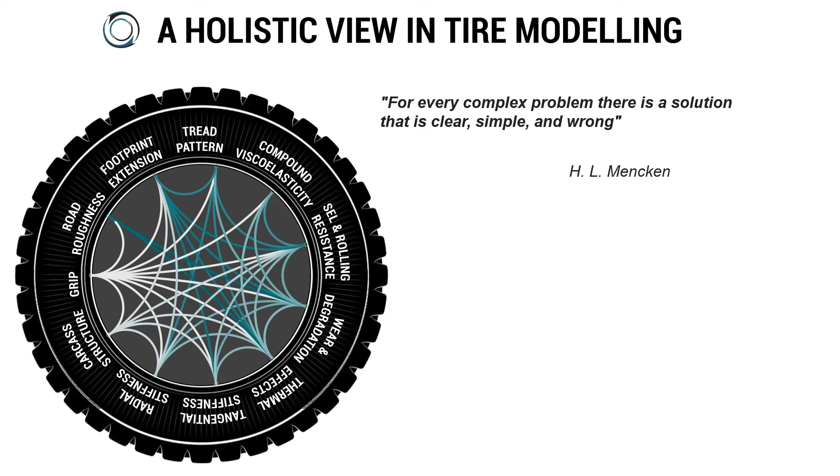The solution to this complexity, in our vision, is the development of a modular modeling platform. We developed two performance tools able to take data from outdoor reality and get the right model parameters. Then we developed four physical models comprising the RideSuite, in which each model represents a physical phenomenon. The user can decide which one he wants to select, creating his own tire model accounting for the aspects needed for the work.

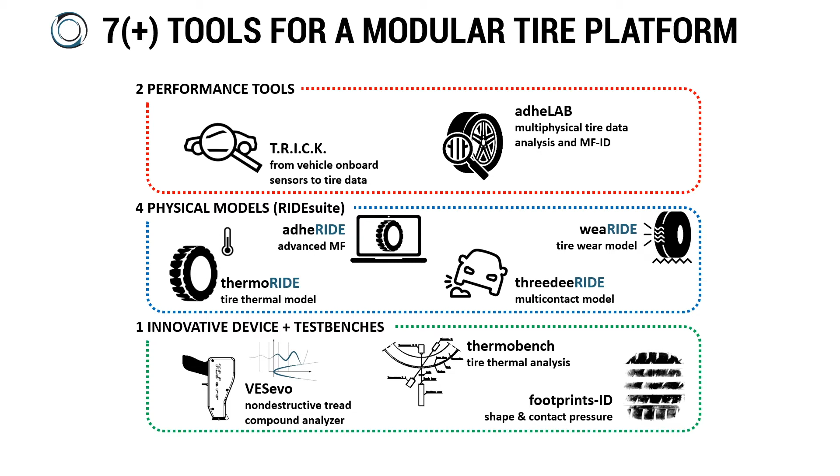And finally, we develop methodologies, testing devices and procedures, able to get the proper data from the tires, feeding the models thanks to fast and non-destructive analysis.

So let's move on the journey. In the last years, we focused on the technological transfer of our methodologies from research to market. We developed our software models in their closed and final shape, creating the RideSuite and its modules. Now we are focusing on procedures and standardization, with the aim of offering our partners a well-defined routine that in about 6 weeks can bring from the black and rolling object to the multiphysical digital twin.

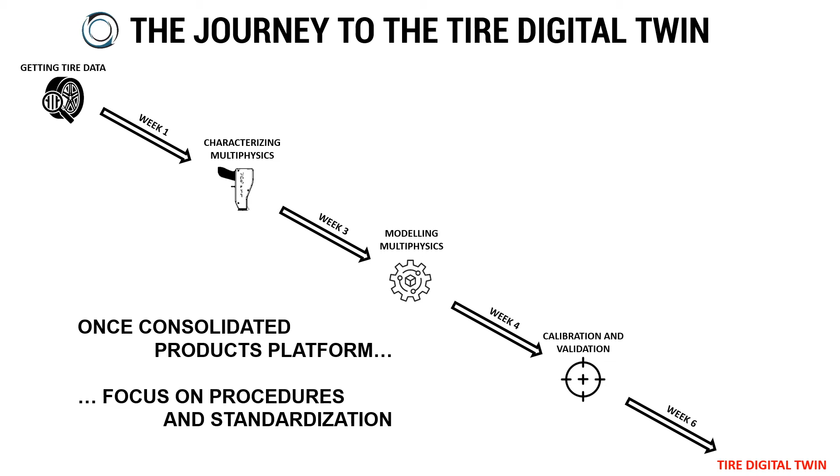So the first step involves getting tire data. I will give you further details in the next slides, but the main aspect in our approach is to be compliant with anything else, so you can use force and moment bench, dyno hubs, trailers, or work with vehicle data by means of the tools we can provide.

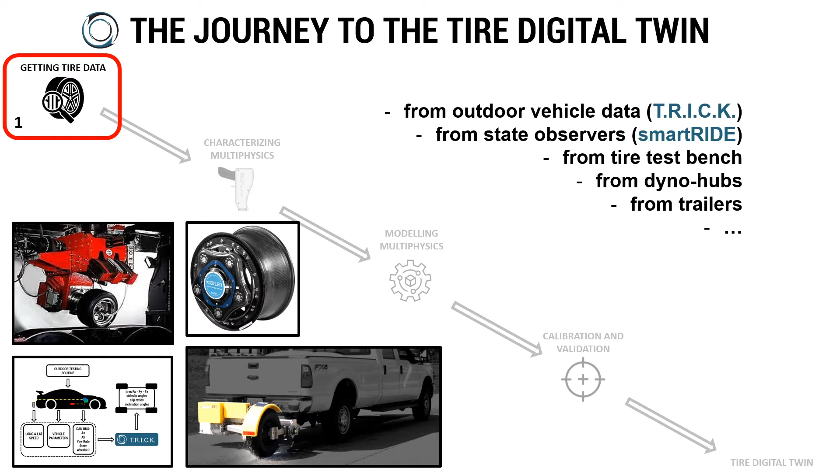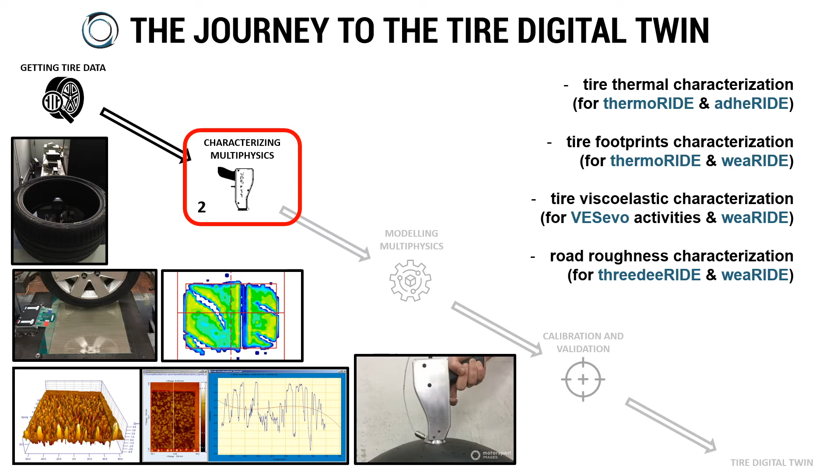Second step, characterizing tires. In a multiphysical approach, this means characterizing from thermal, viscoelastic, structural, and wear points of view, depending on which module our partner wants to work with.

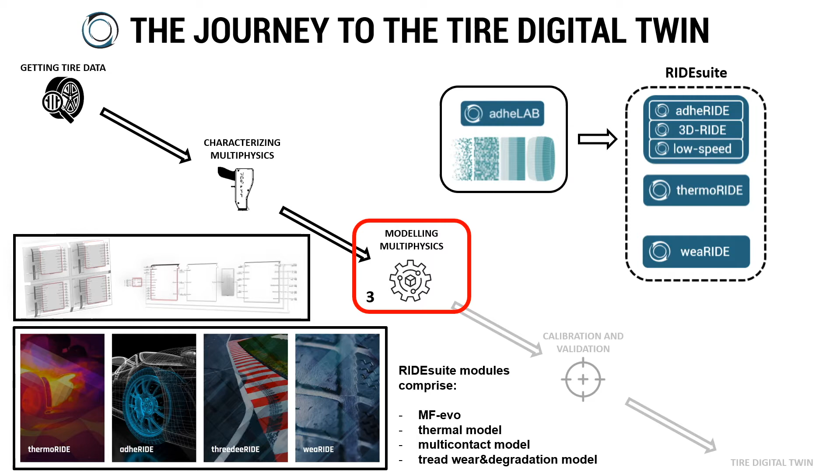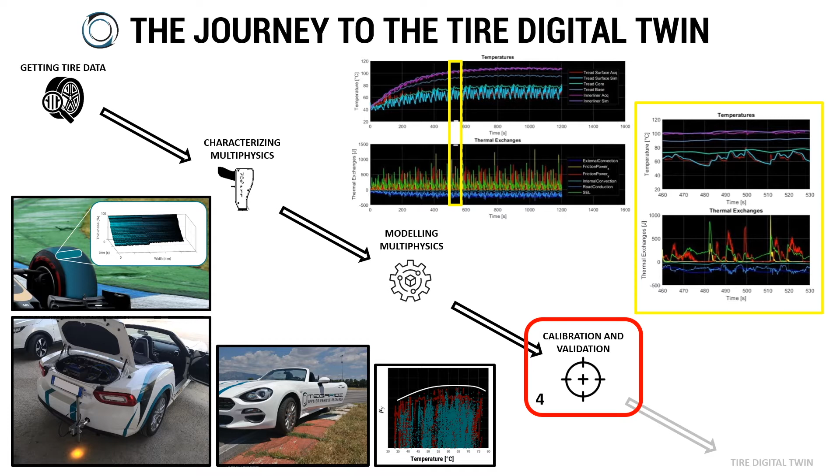Then, third step, implementing these tire parameters inside the physical models of the RideSuite. There is the thermal model ThermoRide, the advanced magic formula adheRIDE, the multi-contact model 3DRide, and the wear model weaRIDE. Then, of course, we need to calibrate and validate the models thanks to data acquired during specific outdoor testing sessions carried out with sensed tires and vehicles.

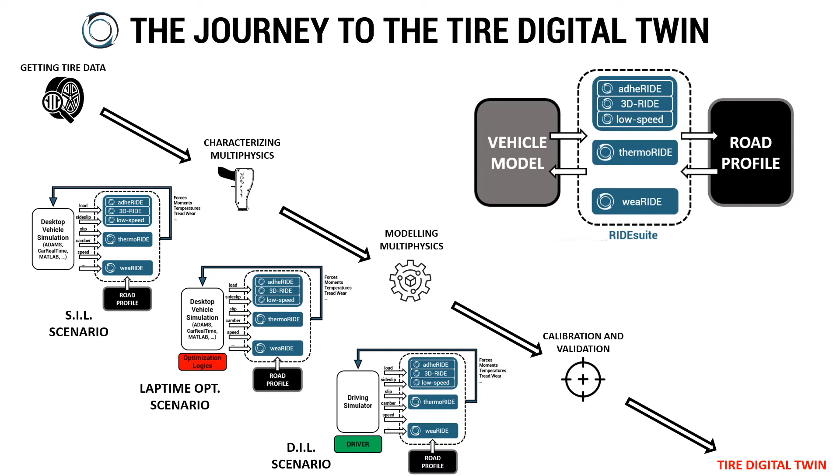And finally, we get our target: a multiphysical replication of the tire behavior that can be used in several application scenarios, from data analysis to software in the loop, driver in the loop, etc.

So, once we've provided a global overview of the presentation, let's go back to the beginning, getting the tire data. The first step to meet the tire involves getting dynamic and kinematic data from it. We all know there are several different methodologies: some of us use force and moment bench, some use dyno hubs, some use trailers and outdoor friction testers.

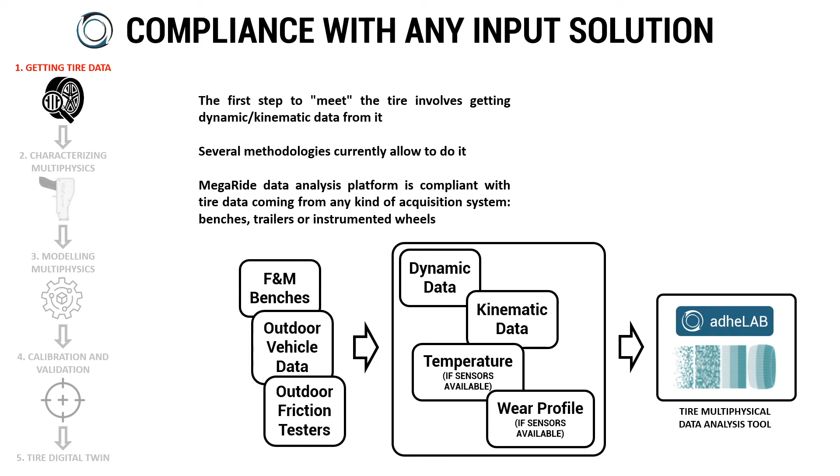We don't have problems with any of them. We get the data from these kinds of tools and subdivide them into dynamic data, kinematic data, temperature data, and wear profile. All this information is analyzed by our tool called adheLAB, which is able to take all these parameters and put them inside our physical models.

In case our customers don't have this kind of technology available, so they don't have a force and moment bench or trailers, they can use, and we usually prefer, this kind of solution: real outdoor data. Outdoor data means real tires, real road, real working conditions.

For this kind of users, we developed the Trick tool that is able to convert vehicle sensor data into tire data. It's a physical vehicle model, and it allows us to convert the data from the vehicle to each corner of it.

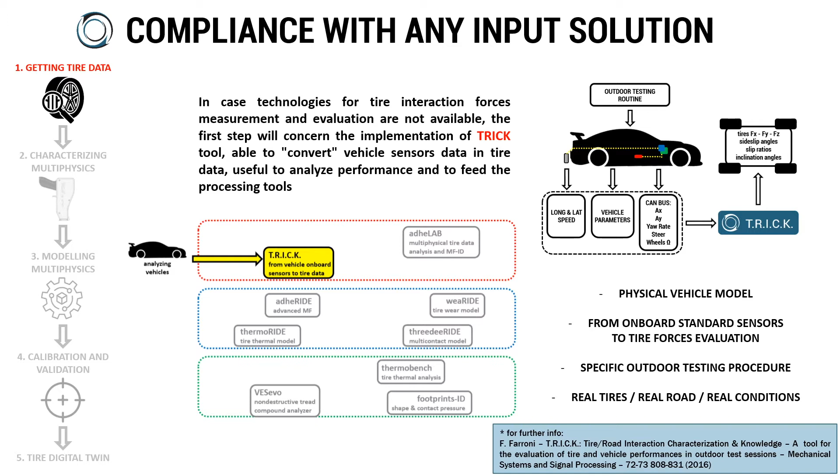In the last couple of years, we also worked a lot on the Trick tool because it allows us to work with heavy vehicles. So we have the Trick for truck, also with two-wheel vehicles, so we have the Trick for bike. We are also working a lot with the new CAN bus and the evolution of the vehicle data we are going to face, so we are developing a 2.0 version of the Trick.

We are also coupling all these methodologies with the real-time onboard state observers that, of course, are growing up quite a lot in our vehicle dynamics community.

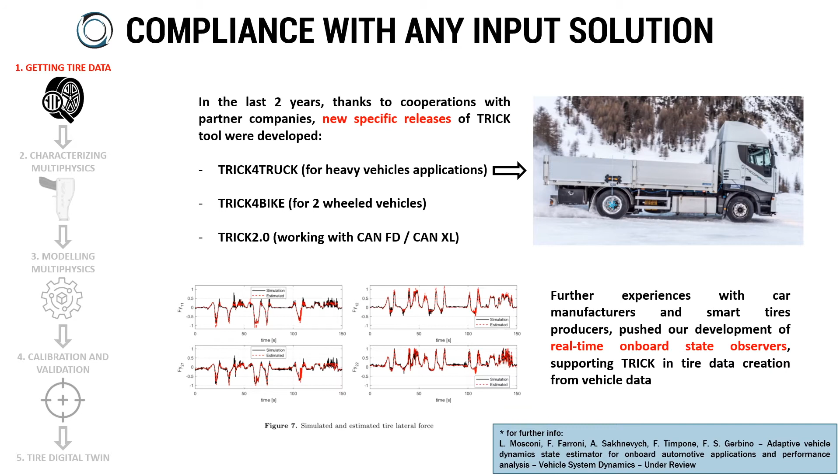Let's go to the second step, characterizing tires from a multiphysical point of view. The first stage is usually characterizing them from the thermal point of view. So if one of our users wants to work with the thermal model, we can identify the thermal conductivity and the specific heat of each different layer constituting the tires by means of a specific non-destructive and proprietary methodology.

This allows us, by means of thermal cameras and laser beams, to identify such quantities. Once the test has been carried out, testing the tires with different levels of thermal power, we can identify the functions with which thermal conductivity, specific heat, and density change for each different material and layer of which the tire is constituted.

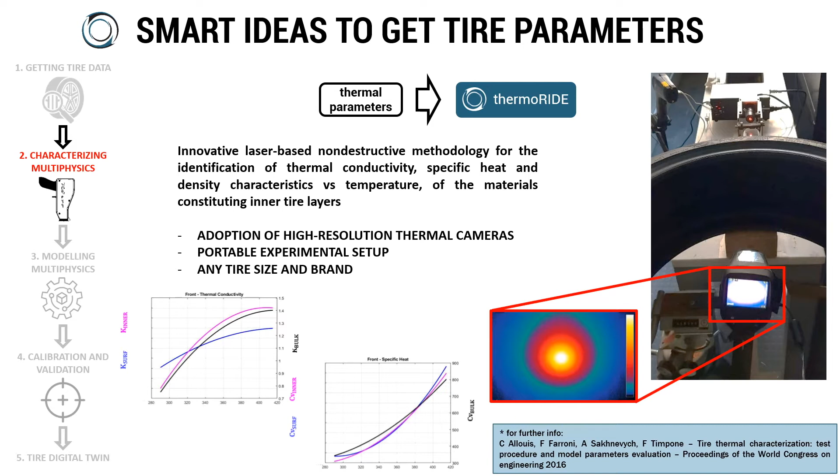Second step, as concerns the parameterization, is the viscoelastic one. We developed, again in the last couple of years, a new device. It's a patented device - we have a patent in many countries of the world nowadays - called the VESevo. VESevo is a non-destructive tire viscoelastic testing device. It's completely portable, fast, and easy to use.

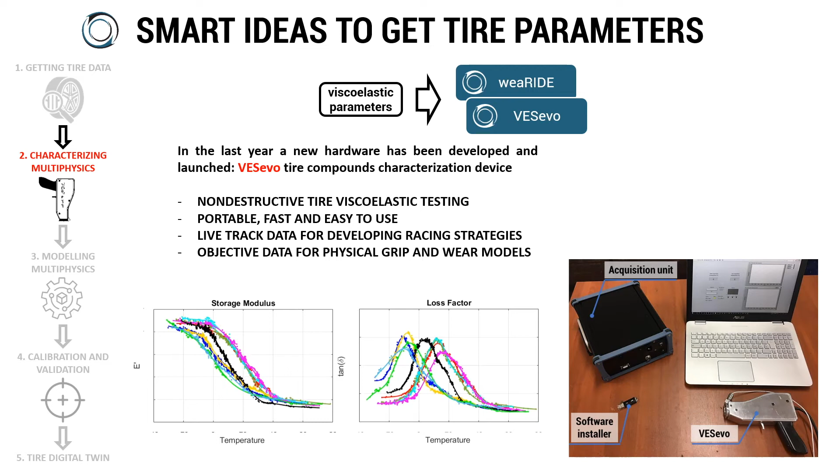It allows us to get the data live from track for the development of strategies to get the right compounds of the tires we have in our garage, and to create objective data for physical grip and wear models. It works more or less as a sort of gun, and it can be useful both on brand new tires, in order to, for example, get a quality check - to check that the tire manufacturer is giving us the proper tires - and to create a compound characterization database.

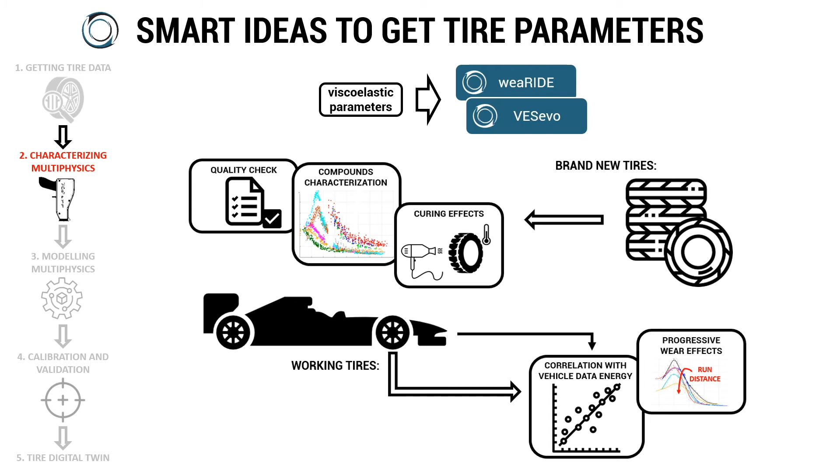It's quite useful usually in the motorsport categories in which we have several different compounds, for example, or it can be useful to understand which kind of curing we can create and use in order to have the optimal effects. We can use it also on working tires because it's very useful to understand how the viscoelastic properties of the materials are changing during the wear and degradation progressive effects.

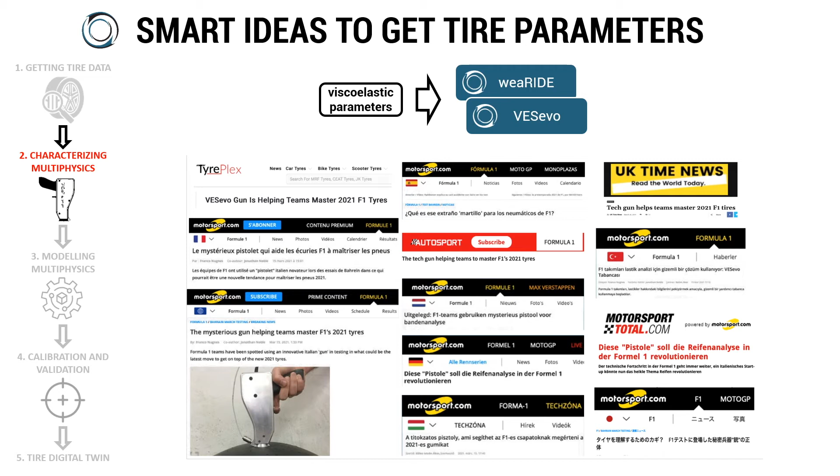This kind of tool has become quite famous in the last weeks because quite a lot of F1 teams used it during the Bahrain test, and here there is a nice press release recalling all the ones who talked about our innovative device in the last months.

Let's go to the third point. We can also parameterize in our tire lab the footprints. So we are now equipped with the Tekscan bench. We have a hydraulic press that allows us to vary vertical load, inclination angle, and inflation pressure, and it can be used also on motorbike and light truck tires.

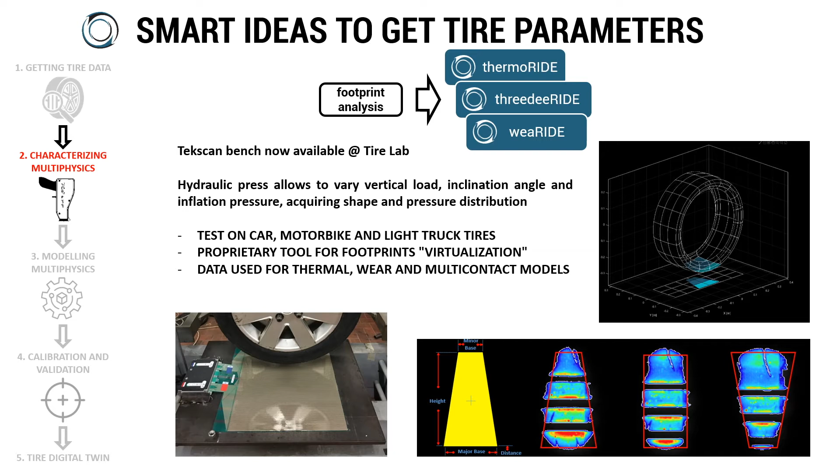We are developing proprietary tools for the visualization and virtualization of these footprints, and they are very useful, of course, to feed the thermal model, the wear model, and the multi-contact model, because we need to know in any moment on which area and in which extension we need to spread the energy that is generated at the tire-road interaction interface.

Finally, we are working a lot on wear models in the last years, and so one of the most important characterizations we need to provide is the one related to road roughness. We are providing quite good expertise on understanding roughness index behavior, both in terms of correlation with grip and with wear. In this moment, we are able to feed our tools with all these very important parameters, both on macro roughness and micro roughness road scales.

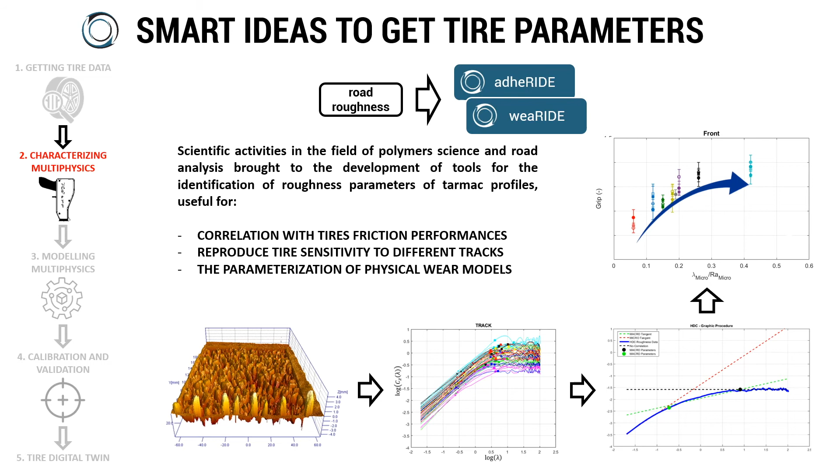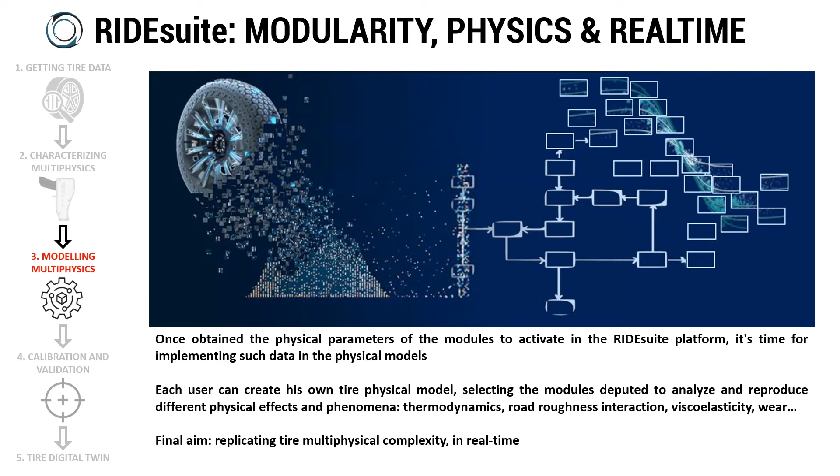So, third phase: once we have all the information about the parameters of the physical model we need to work with, we go to the modularity. We developed a modular multi-physical platform. We need to put all this information together and put it inside the model, inside the different modules that are able to replicate different aspects.

So we have 4 different physical models: thermoRIDE, adheRIDE, threedeeRIDE, weaRIDE. Thermoride talks about temperatures. Its inputs are the footprint, the thermal parameters, and of course the vehicle tire input data. They are processed inside a real-time analytical model that gives us the tire temperature local distribution, the tire energetic contribution, the inflation pressure.

adheRIDE is a patented model that is an advanced version of the Pacejka magic formula. It works more or less equally to a Pacejka model, with the same classical inputs, but new inputs are tread temperature, road roughness, compound viscoelasticity, and much more. Its outputs are the usual outputs of a Pacejka, so it can be inserted in a classical loop with a Pacejka model, but it's able to take into account all the multiphysical aspects concerning temperature, roughness, and compound viscoelasticity variation due to degradation.

The 3D ride model is a multi-contact module, so it's very useful inside the driver-in-the-loop activities because it allows us to go over the problems that the usual single point contact models have.

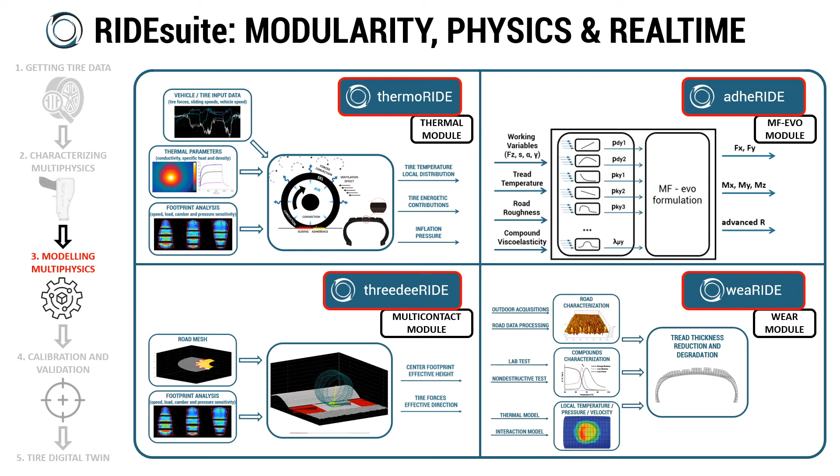Finally, the wear ride model is the new one. It works with road characterization, with the compound characterization that comes from the VESevo innovative device or from the DMA characterization of the tire makers. It works with the local temperature, pressure, and speed in the footprint. We have a physical model that works with this data and gives the tread thickness reduction and degradation that can be an input for the other models.

Now we can go to the testing ground once back, because usually in our activity with our partners, we work organizing and developing some specific outdoor testing sessions. They are used because, of course, we need to calibrate some specific physical aspects, in particular, for example, the footprint dynamic shape effects or the aero design that acts on the tire convection with the external air.

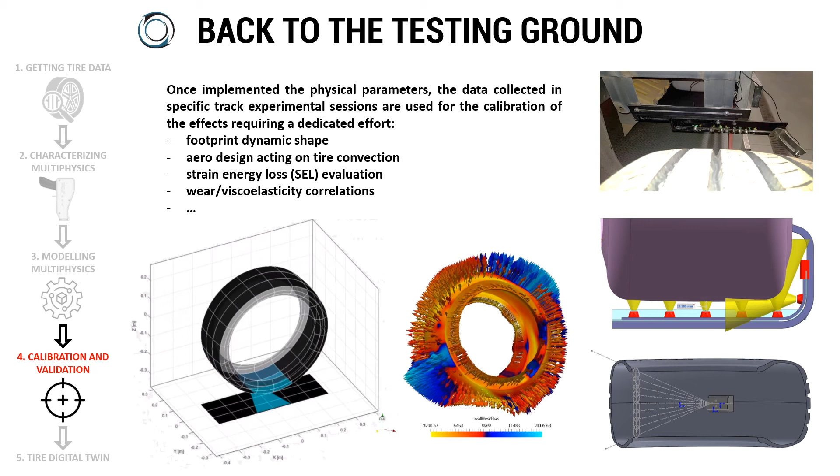We need to parameterize the strain energy loss component of heat generation and all the correlation between, for example, wear and viscoelasticity. So we go back to the testing ground and we can validate some of the models.

For example, for what concerns the thermal model, we validate it by means of specific acquisition with the vehicle properly instrumented with infrared sensors at the inner liner and at the external surface temperature, with inflation pressure sensors, and we are able to validate and calibrate a multi-ribbed model.

So we are also able to work, for example, with high-performance motorsport bike tires that go up to 65 degrees of camber angle. It's a multi-rib model that has a high discretization in terms of circumferential, lateral, and radial direction.

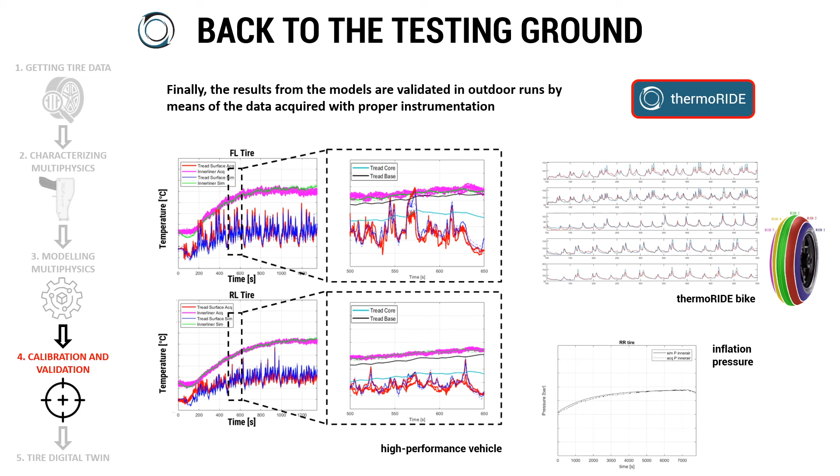We can validate, of course, also the dynamic model, so the advanced Pacejka model. It can be validated by means of data that come from the instrumented vehicles, or from the data from the test benches, or in general from the global fitting of the global behavior that the whole vehicle has, compared with the simulated model with the tires implemented by means of adheRIDE.

We can, of course, take into account, thanks to this model, the correlation between grip and temperature with different levels of thickness at which we measure our virtual temperature, or we can take into account all the cornering stiffness and braking stiffness effects when the temperatures vary.

So in this way, we are able to calibrate the global overall vehicle behavior in terms of vehicle dynamics.

We can, of course, validate and calibrate the wear model because we just need to get some data about the progressive thickness reduction of the tread on the proving ground, and we can calibrate and validate it with what happens inside the compound, because the compound changes dramatically its behavior in terms of viscoelasticity at increasing mileage. In this way we can understand how to set the proper values at which the tread is going to reduce thickness, but moreover how the performance is changing because of degradation effects coming from the compound changing the global behavior.

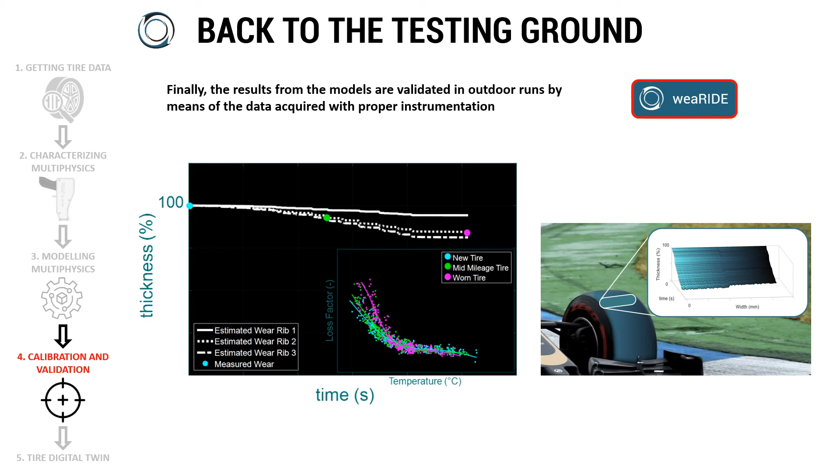Finally, we validate our 3D-RIDE model. It's a sort of ride model in which we have a multi-contact envelope of the asperities. So when we hit the curb, when we take the macro texture of the 3D scenario on which our simulation is running, we can understand which is the real vector at which the force goes to the suspension system, and what's the virtual plane in which the force exactly acts at the center of the footprint.

So now we have all the ingredients of the recipe, so we have the final tire digital twin. We can understand which are the potential scenarios of use. So we developed the RIDEsuite with the specific aim to be totally compliant to any kind of tire interaction model and simulation environment.

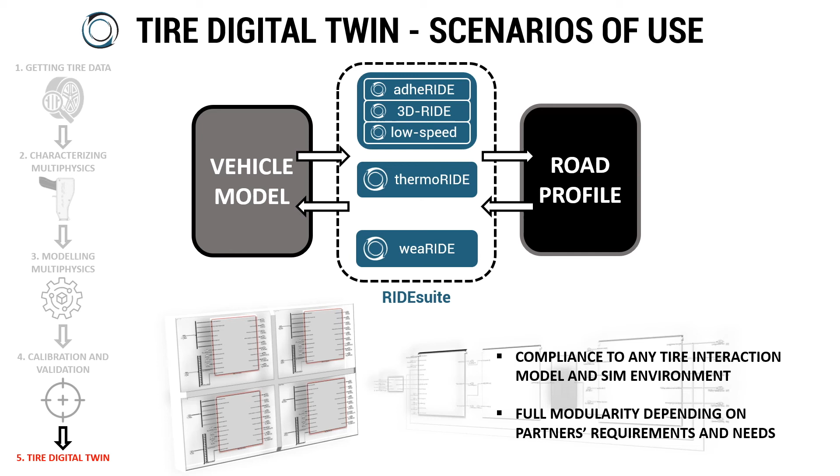Moreover, it's totally real-time in any kind of application, and we don't need to rebuild, recompile, or change anything inside the model. It's always exactly the same model, useful for data analysis, performance optimization, or driving in the loop applications. It was born to be real-time, and it will be real-time in any kind of application.

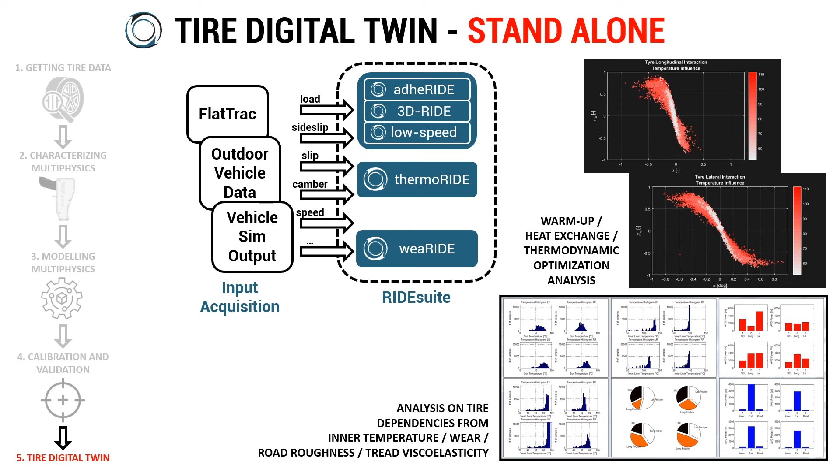The first scenario is standalone applications. We get data from FlatTrac, outdoor vehicle data, or vehicle simulation output. We analyze all this data with physical models to optimize the warm-up phase, understand heat exchanges, and perform thermodynamics analysis to optimize thermal behavior and consequently the performance and adherence behavior of the tires. We can also analyze dependencies of grip on temperature, wear and degradation, road roughness, and tread viscoelasticity.

The second scenario is offline simulation. Last year, in 2020, we worked with VI-grade on a case study involving the Mercedes DAS system—a classical software-in-the-loop simulation environment. We have our desktop vehicle simulation, which can be Realtime, ADAMS, or your own MATLAB model. The tire model provides all the quantities in the loop, and it can work for car, bike, or truck, also taking into account road profiles when interacting with the external virtual environment.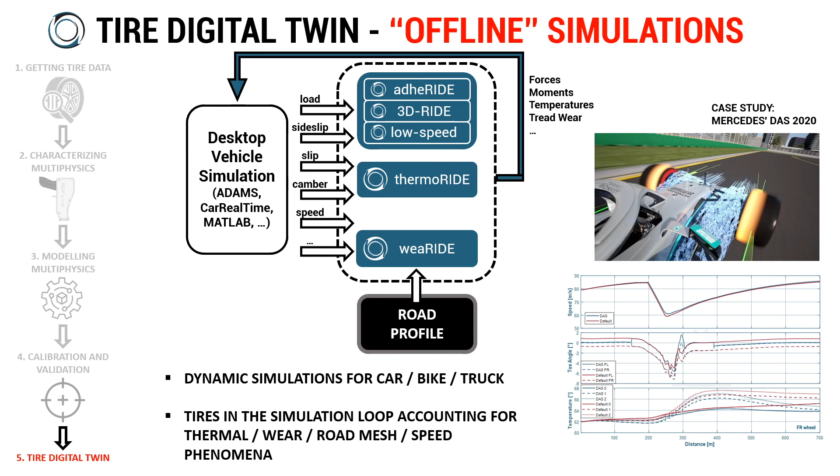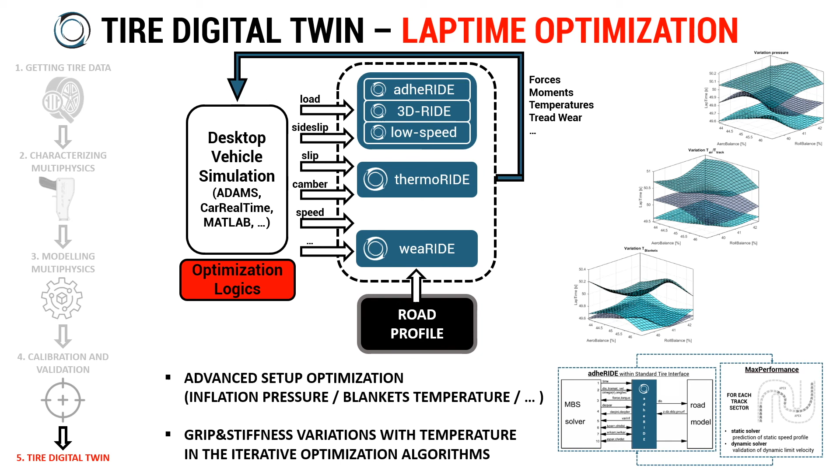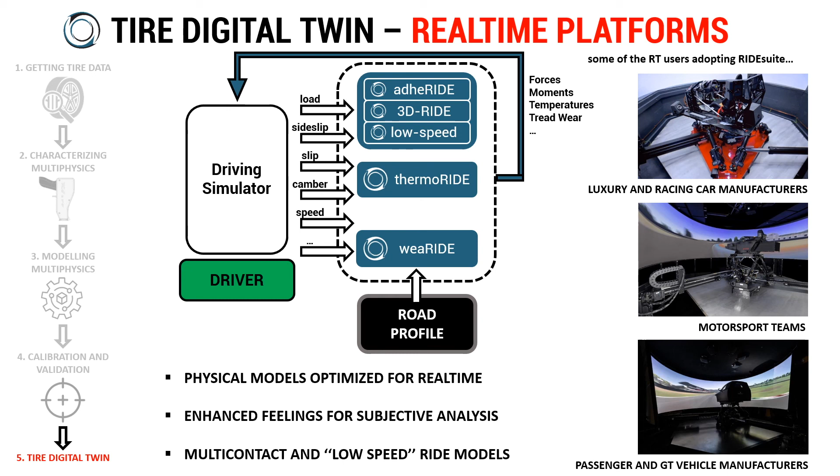We also have more modules used by driving simulator users at different levels, since luxury and racing car manufacturers have equipped our models. Some motorsport teams working in different challenges, as well as passenger GT vehicle manufacturers, use them too. So at this moment, our models reach a very wide scenario of users.

Where are we going now? We have some technical targets close at hand. In 2021, we will release our tire model 2021 in June, and inside it there will be the tire tool. This tool allows customers to become more and more independent from us—they'll be able to customize and calibrate the model using their own data without always passing through us.

Our tool to do this job, called AdaLab, is ready for the market. It allows users to get data from the experimental platform, process it from a multiphysical point of view, and integrate all the data put inside the different physical models.

We are growing, and we have some strategic targets. We are opening interesting new markets, extending our activities towards North America and Japan. We're also going to hire new resources—PhDs and full-time people—inside MegaRide. And we're going to open a new business branch focused on tire-centered control for real-time application, onboard application, and the new frontiers of autonomous driving.